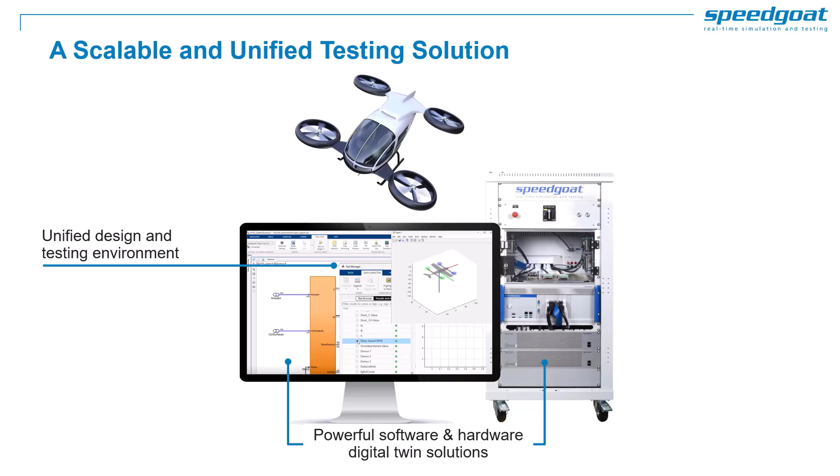In the following, I would like to show you how engineers can successfully handle all those complex tasks using an end-to-end development and testing solution by MathWorks and Speedgoat. You will learn how to benefit from a fully Simulink integrated solution that provides flexible and automated workflows, powerful digital twin simulation software, hardware emulation solutions, and modular racks for hardware-in-the-loop testing, or HIL testing in short, that can scale with your needs.

Before we dive deeper into these solutions, let's review today's webinar agenda. First, I'll introduce typical workflows and the key capabilities of the solution. Then we'll shift the focus towards dedicated controller hardware-in-the-loop testing solutions covering eVTOL powertrains and more electric aircraft with two hands-on demos leveraging Simulink and Speedgoat Test Systems. So let's get started.

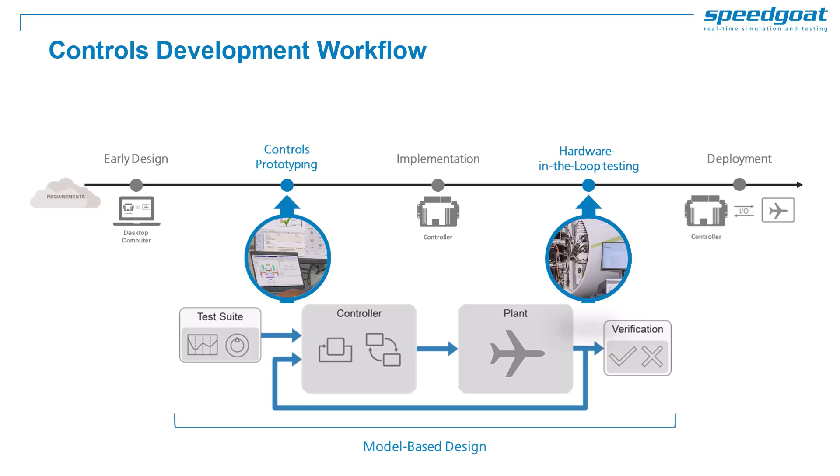What we see here is a default model-based design control development workflow. Every development project starts by defining the requirements.

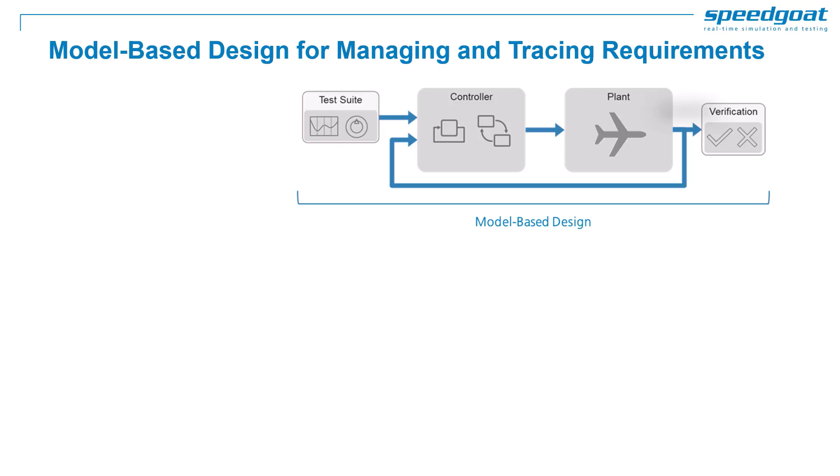Also in aerospace development, compliance to requirements is the overarching goal. Depending on the requirements, they are either stored in documents or tables. Others may already be put into more structured environments like DOORS or other tools. Some requirements may even change along the way, but that will pose no problem if those requirements are rigorously tracked and connected to tests.

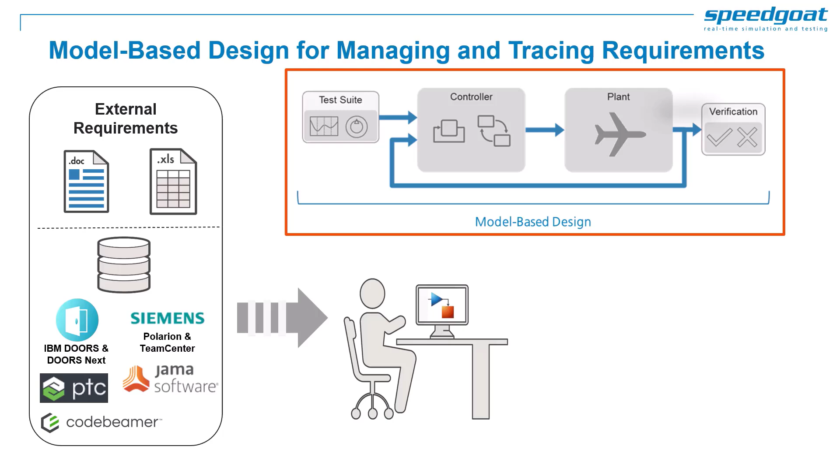Let's see how requirements and tests are connected. Engineers add those requirements to Simulink and convert them into test cases attached to certain models. This enables verifying that new designs meet the requirements. Already here, it becomes obvious that a single location for all test cases is utterly beneficial. So Simulink is not only the development and testing platform, it also helps tremendously to trace requirements.

Let's look a bit deeper into the details. You can import requirements from various sources, and the standard requirement interchange format is supported. You can also author requirements directly from within Simulink.

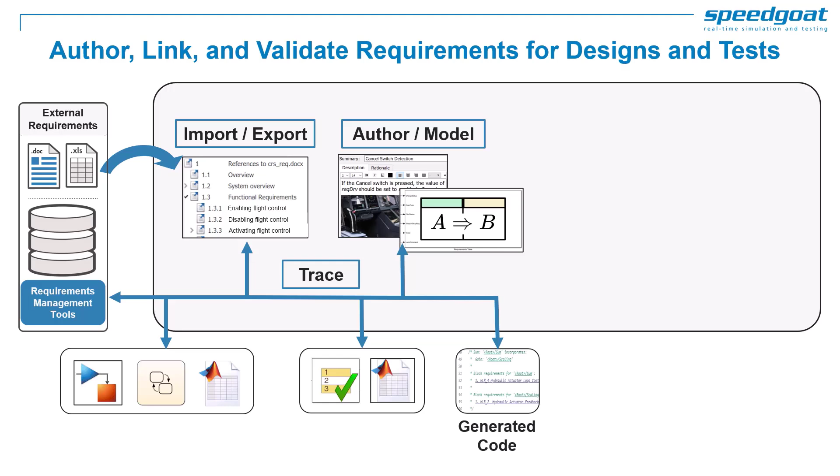With the requirements stored in the development environment, it is very easy to create links between requirements, architecture, design, test and implementation code. Links can be inserted in other tools for traceability, from these tools to MATLAB and Simulink. The coverage analysis reveals the gaps in the implementation and testing.

No problem if requirements change, because if there's an update, there can be an update operation that synchronizes the changes, and notification is given on what is impacted by the requirement change. Reports can be generated for documentation and reviews that include traceability.

Now I would like to show you how model-based development fits into your aircraft system development according to Aerospace Recommended Practice, or ARP in short, 4754A. ARP 4754A is endorsed by civil aviation authorities to provide best practices for demonstrating compliance with regulations.

The development process is broken down into several stages: functional development, allocation of functions to systems, system architecture, requirement allocation, and system implementation, ending with documentation.

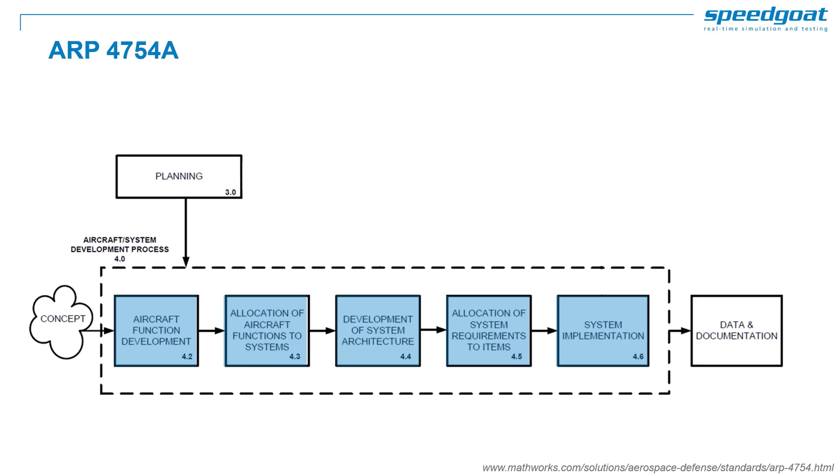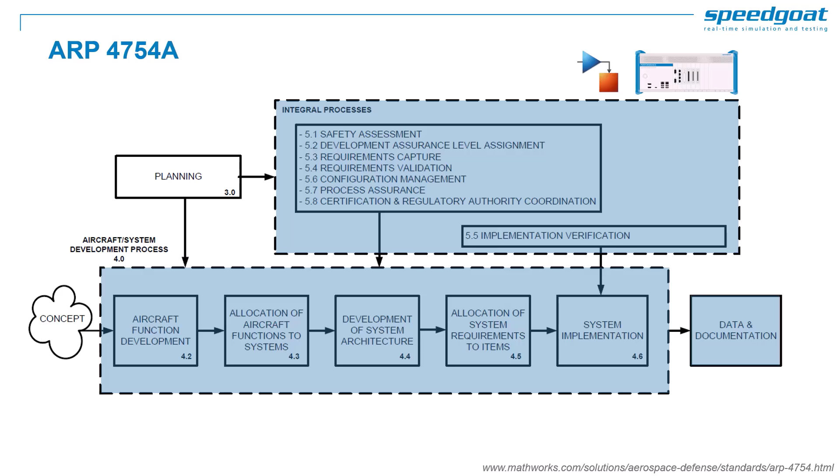To have a complete development and certification, it is important to have a tool chain covering the entire process. So if you are using Speedgoat real-time test systems, you will have a unique and complete integration into MATLAB and Simulink from MathWorks. So all in all, real-time testing enables compliance with ARP 4754, as all aspects of this guideline are covered.

We have seen this development workflow with its stages before. So after requirement definition, you may want to evaluate some early designs on the desktop.

You will likely run some promising control designs on powerful prototype controllers to test how they behave when controlling the actual plant. Once your controller is available and you've successfully implemented your design, you can test your controller as hardware in the loop. So let's dive deeper into these two concepts, starting with controls prototyping.

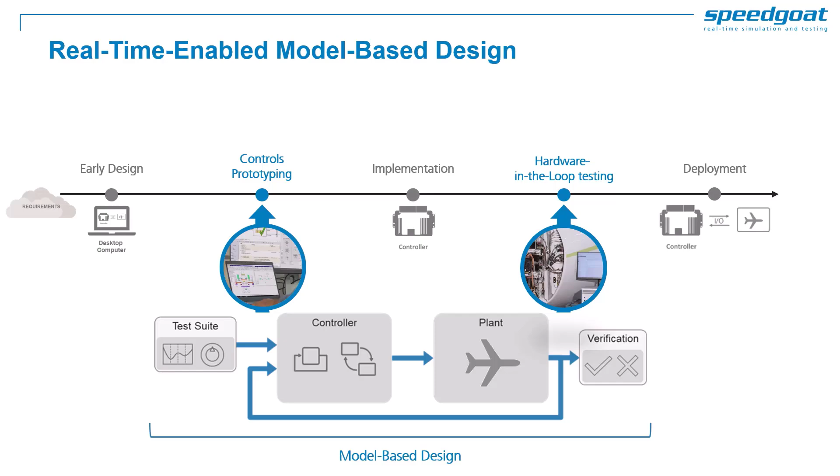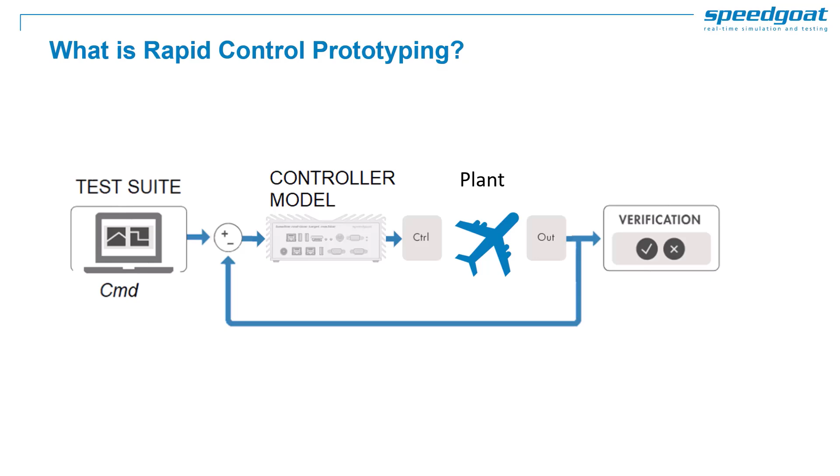In rapid control prototyping, the plant could be your aircraft or Ironbird. The development task focuses on the design of the controller. This means that the real-time target machine emulates the controller and executes the code of your embedded control design in deterministic real time. Performing control tasks in a loop allows you to verify that the controller fully meets the requirements. Early testing of a control algorithm can help you eliminate errors early on.

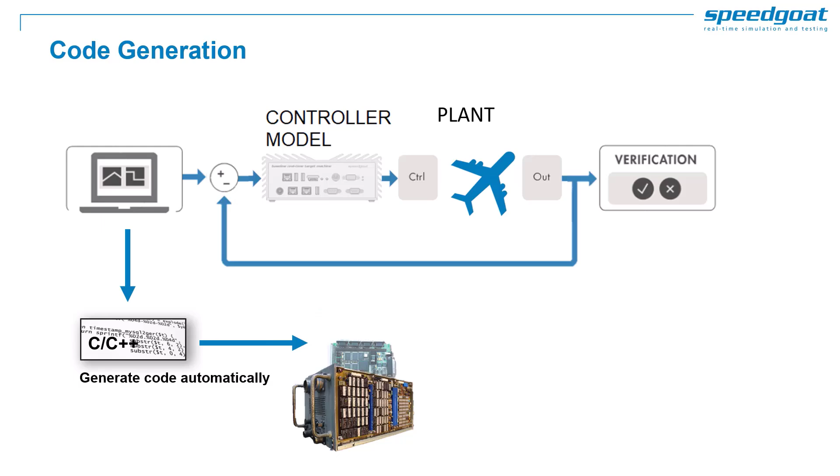Once you are happy with your control design and its behavior in the prototyping setup, you can automatically generate the algorithm in C or HDL code. After compiling the code on your controller, you can then go ahead and test it.

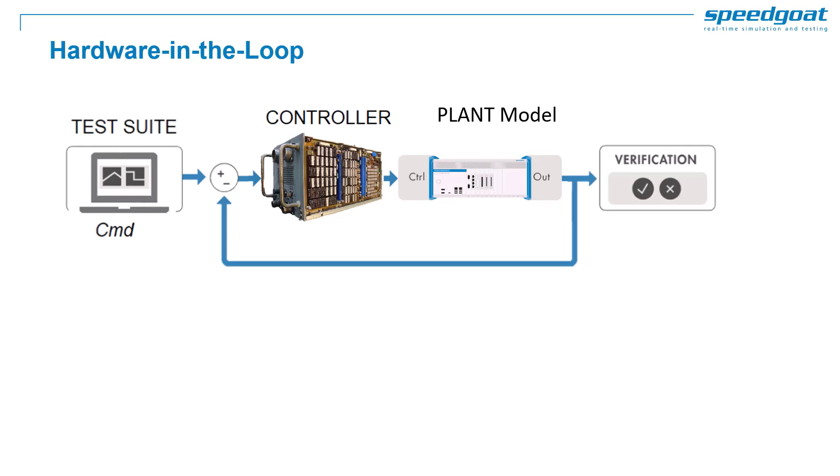You probably do not want to directly put the flight controller into the aircraft. Therefore, you can conduct hardware-in-the-loop testing, where you take your physical controller and run it against a real-time test system, which is a virtual representation, or one could also say digital twin, of your plant.

I would like to emphasize the key differences between testing based on data or data acquisition and hardware-in-the-loop testing. Most of you are already familiar with some form of data-driven testing. Engineers use this in their everyday life: record data, do some post-processing, and perform open-loop testing.

A key advantage of hardware-in-the-loop testing is, and the expression already has the keyword in it, closed-loop testing. This means that you can run dynamic scenarios and interact with your controller. The complete test process can be automated, allowing you to perform complex tasks with a click of a button and to automatically generate test evidence using automated report generation at the end.

You can test against a set of requirements and perform regression testing in case you have some last-minute changes to your code. This approach allows you to test your controller in real time, which cannot be achieved by just doing measurements or data acquisition. Beyond that, hardware-in-the-loop testing allows you to perform system-level integration testing under all possible operational conditions.

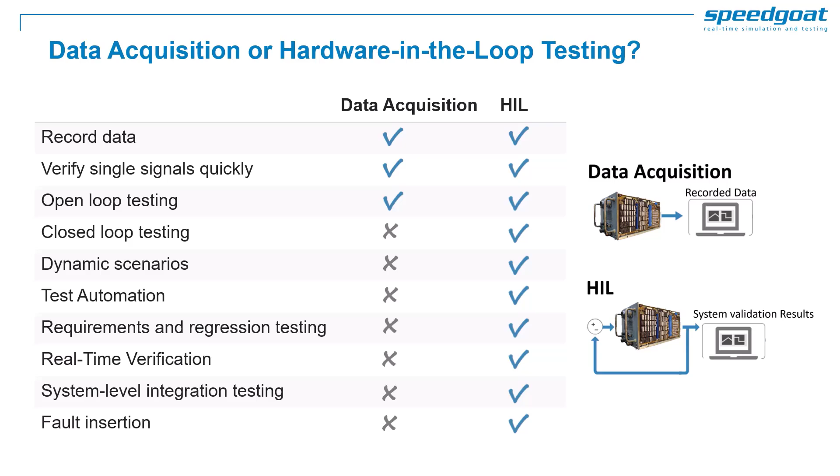Electrical vertical takeoff and landing aircraft, or eVTOLs in short, as well as conventional airplanes, consist of many subsystems. These subsystems must be integrated into one system. To integrate all these subsystems and components, system integration labs, or Ironbirds, sometimes called eBirds if the aircraft is purely electric, have become industry standard.

To get an accurate representation of different flight states, the complete system needs to be run in real time with the respective sensor feedbacks and flight states. Therefore, the digital twin needs a host system which allows it to interact with the Ironbird.

If individual components are emulated instead of being integrated into the Iron Bird, the real-time hardware-in-the-loop test system can handle this by emulating necessary signals, voltage levels, and mimicking the subsystem behaviors.

To test software according to the DO178C standard or hardware to the DO254 standard, it's crucial to ensure all controllers operate as if they were in an actual aircraft and flight state. Therefore, the same twisted pair wiring and voltage levels, such as 28 volt for avionics, are used.

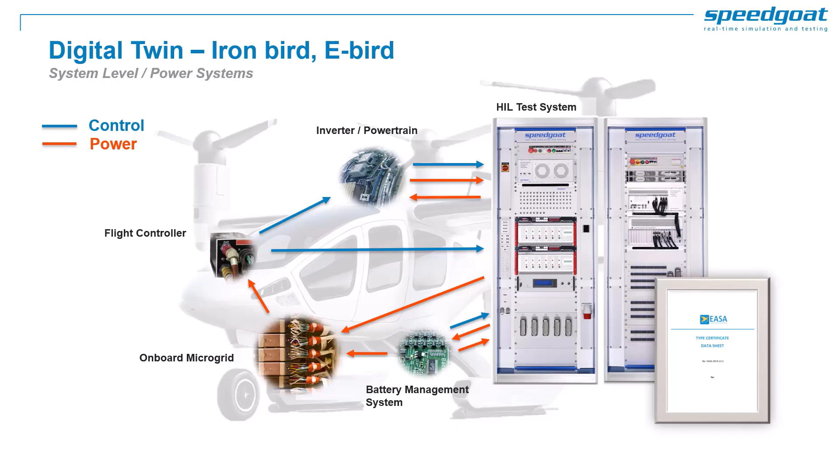Let me give you a better overview on how a hardware-in-the-loop test system of an e-bird is composed and used.

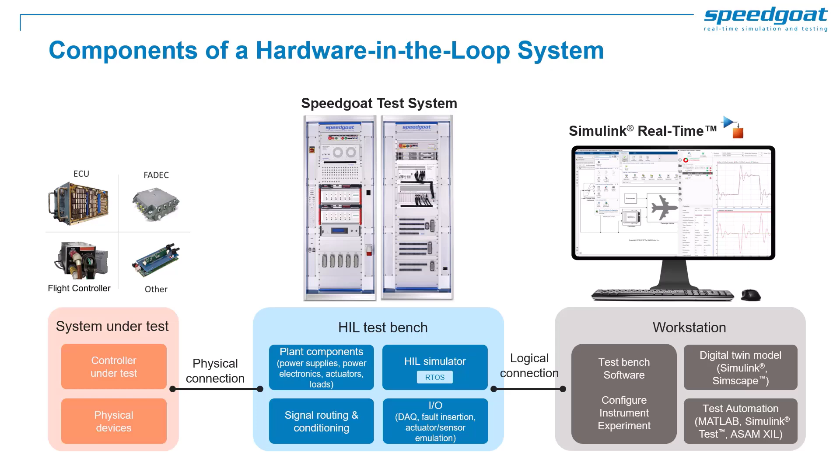There are typically three main components in a HIL test system. First, your system under test, which includes the production controller that requires thorough testing and additional physical components like domain controllers, sensors, and actuators. Second, a HIL test bench, including a real-time simulator where you can run a digital twin of the plant together with emulated plant components and I/O modules supporting data acquisition, signal conditioning, and communication with the system under test. Third, a workstation running application software that supports the setup and operation of the HIL test bench.

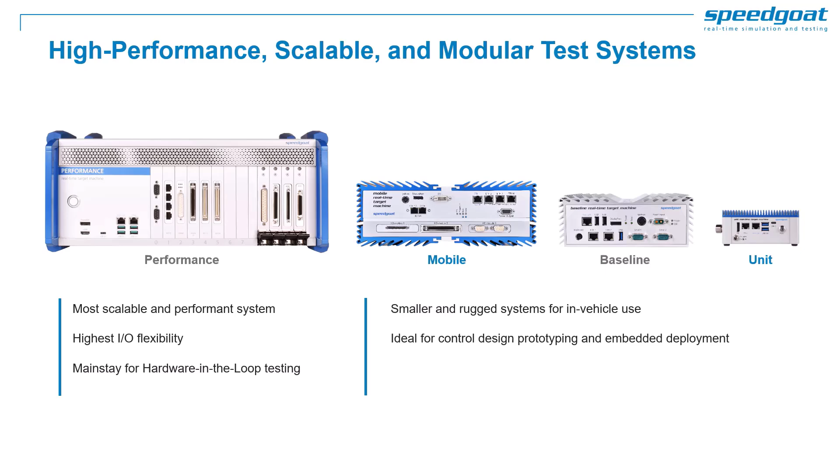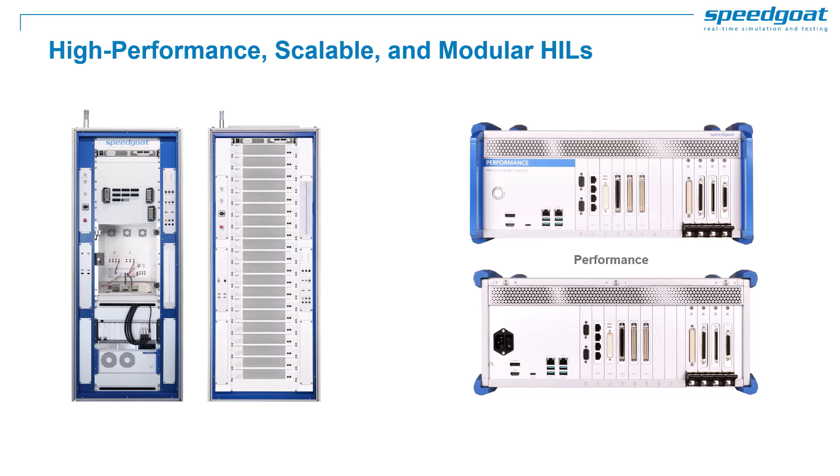The performance test system is suited for desktop use, but also for rack mounting. Speedgoat's HIL system team can provide you with fully customized rack systems for HIL testing, including easy access to all signals via breakout and I/O panels. We'll integrate power supplies, actuators, inverters, and any kind of power electronics, as well as project-specific PCBs for signal routing and conditioning.

Let's move on to focus on dedicated solutions for controller HIL testing of aircraft controllers. We'll start with a workflow demo for an eVTOL powertrain. Yatin, I'm handing over to you.

Thanks, Christoph. In this demo, I will be focusing on ECU HIL testing of eVTOL powertrains. I'll start by exploring the hardware setup and the eVTOL digital twin model behind this demo. Then I'll move on to the actual HIL demo and cover eVTOL real-time simulation, unit-level testing of battery management system and motor control units, and finalize by showing how to automate testing of requirements for specific system-level test cases.

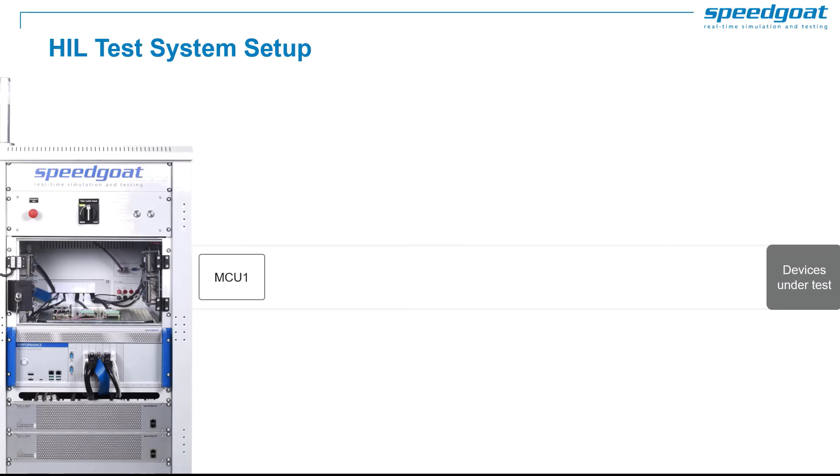So let's start by outlining the HIL test system setup. We are using a smaller scale demo test setup to test two powertrain controllers: a motor controller unit that governs operation of one of the four 200 kilowatt electric drives, and a battery management system composed of a battery management controller unit connected to two real cell monitoring units. ECU communication runs over a CAN network.

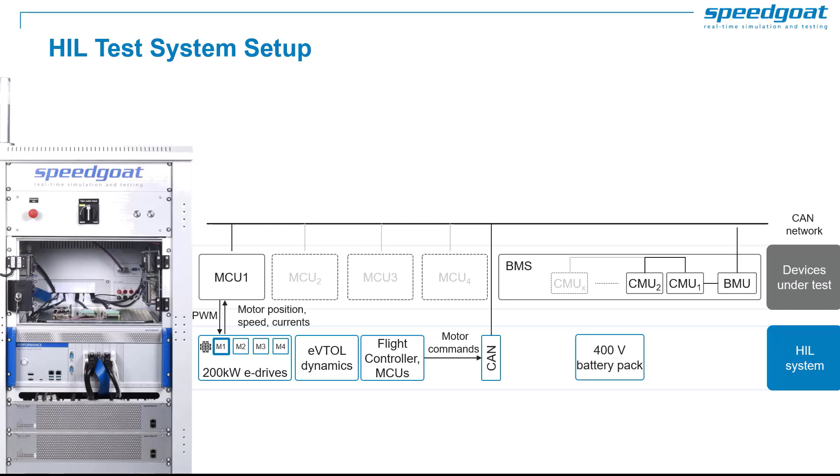For the eVTOL digital twin HIL simulation, we are using a performance real-time target machine. This system runs virtual ECU simulations for the flight controller and remaining motor control units. The eVTOL dynamics FPGA-based motor drive simulations enable encoder and current sensing emulation to the real motor control unit, as well as a 400 volt battery simulation model to meet the interface needs of the two real cell monitoring units and enabling testing of the analog front end.

We have integrated two battery cell units, providing realistic cell level emulation for 24 out of the 100 cells of our battery pack. As this demo system does not integrate emulation of hardware for temperature sensors, the current shunt, or the missing cell monitoring units, the simulated signals are fed to the BMS controller through the existing CAN interface.

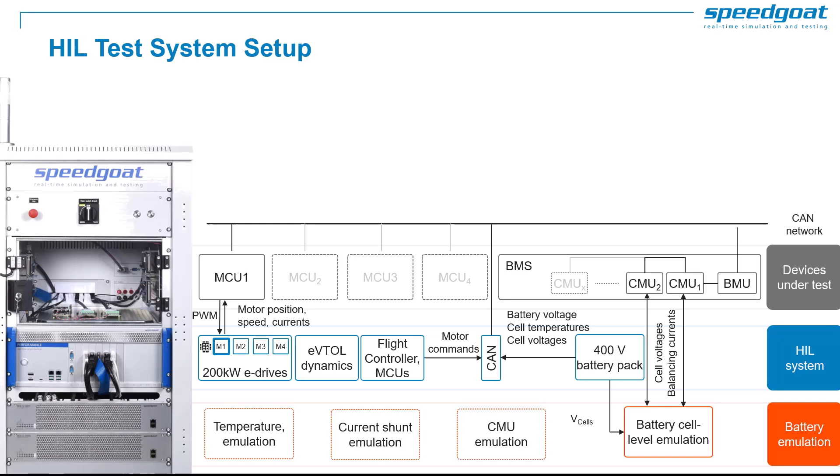The entire HIL test system is managed from a host computer, which enables control and monitoring of the real-time application as well as 3D visualization of the aircraft and surrounding scenes.

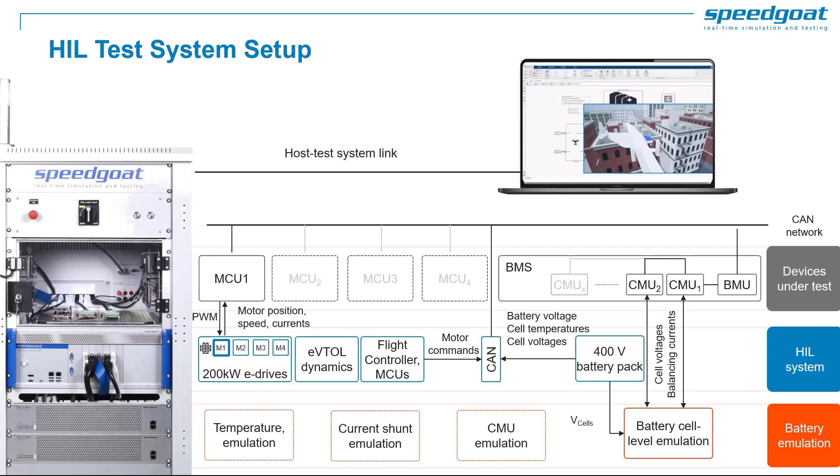Let's now switch to Simulink and check how these blocks map to a real-time application and Simulink models. Our eVTOL model features a flight controller that sends commands to the motor drive, which integrates 4 rotary propulsors.

The battery system consists of a 400-volt battery and a battery management system that ensures safe operations and cell balancing. The flight dynamics subsystem adds physics and gravity, enabling us to visualize a vertical takeoff and landing aircraft in Unreal Engine while flying a mission within an urban environment.

Let's leverage the custom active workflow of UAV Toolbox to visualize aircraft performance in a photorealistic environment.

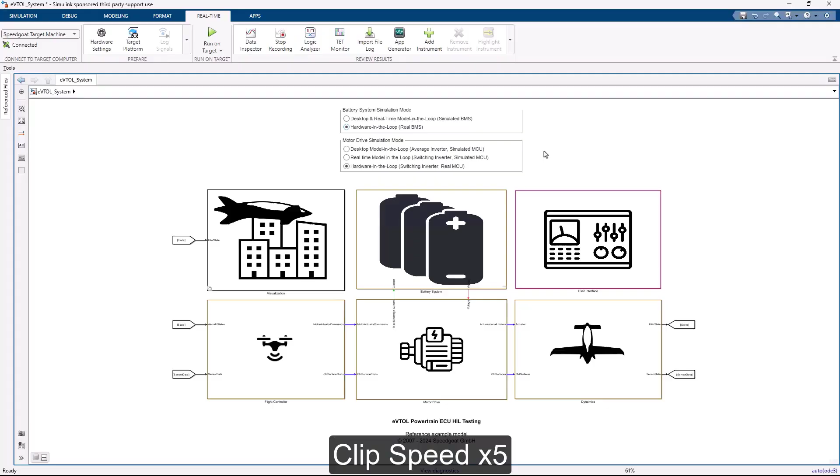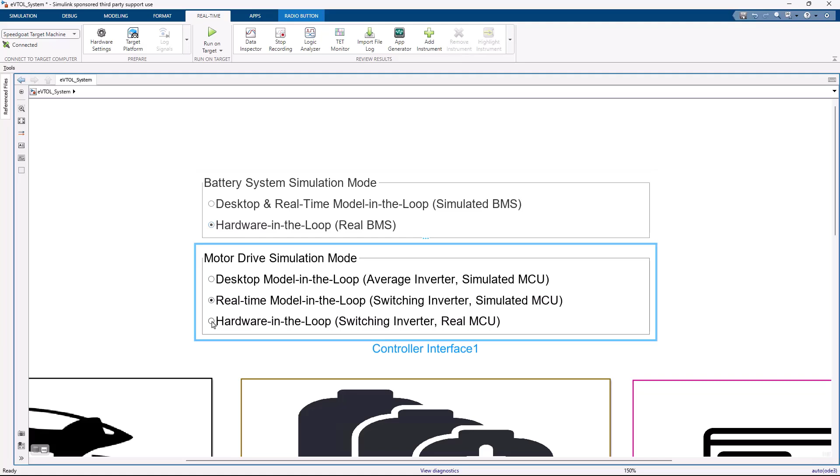Different simulation modes can be selected for BMS testing and motor control tests. The options include hardware-in-the-loop testing, which allows us to emulate the battery on a battery cell emulator and test battery control algorithms on an external ECU, and a real-time motor simulation on a Simulink programmable FPGA, enabling simulation of high switching dynamics, fault insertion, as well as encoder and phase current emulation, while testing the motor control algorithm on an external ECU. We can also select desktop simulation, which allows testing in the initial development phase, useful for iterative debugging sessions.

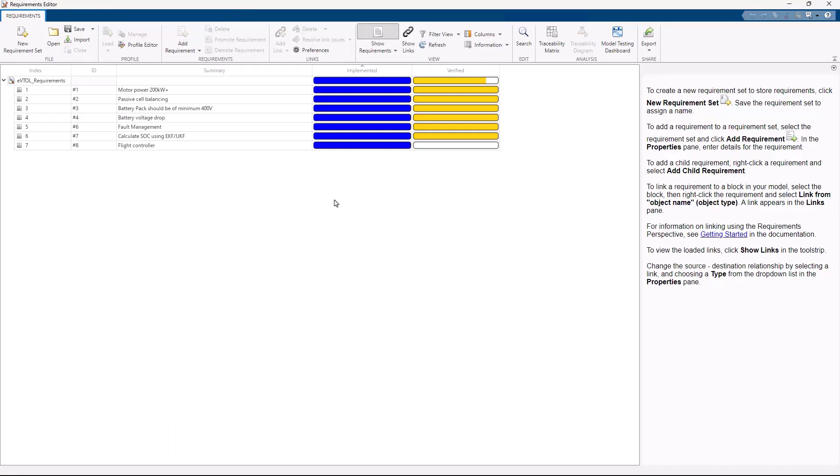The model also serves as a digital thread connecting design requirements to model components and test cases using Requirements Toolbox.

Requirement Toolbox enables us to validate requirements within MATLAB and Simulink. The requirements are linked to a subsystem where it's implemented.

For example, the logic for battery voltage drop limit is implemented in the BMS controller subsystem, and the calculation of state of charge is verified using a Simulink test linked to a Simulink test manager, as you can see here.

Simulink test manager is a tool that helps to create test cases for Simulink models and code in Hardware-in-the-Loop execution environment.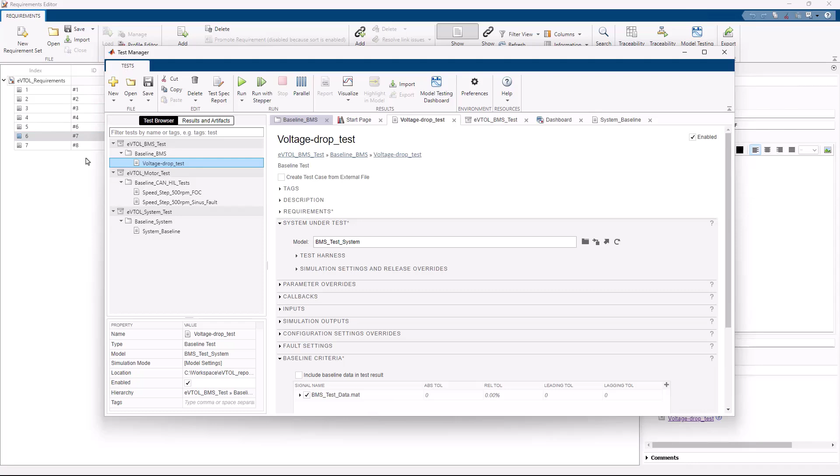This allows us to formalize the requirements and analyze them for consistency, completeness, and correctness using the requirements table. Let us start the demo by running our eVTOL in real time for a guidance test.

The system user interface displays motor speeds for all 4 motors, battery voltage, current, power, and the state of charge of the battery. It also displays the currents from the motor for system level monitoring and testing.

We can also manually control the aircraft to handle specific maneuvers by changing the input commands to the aircraft.

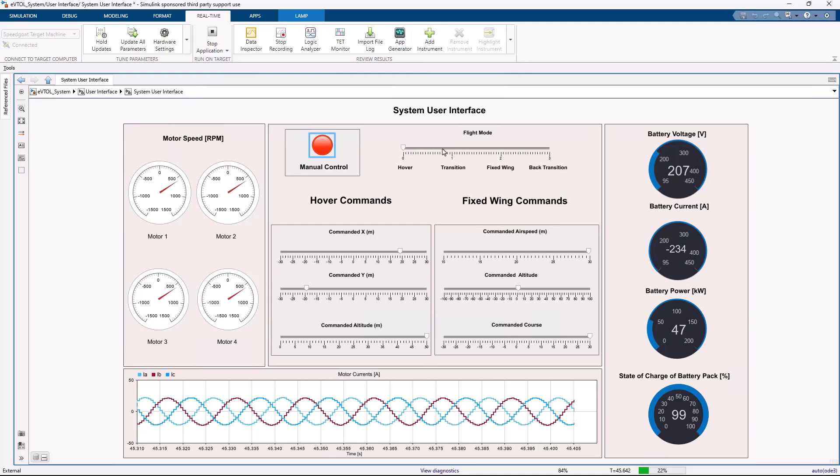As the guidance test scenario runs, the rotary wings move the aircraft from its initial position to a certain altitude, hovers, makes some turns, and eventually lands back vertically.

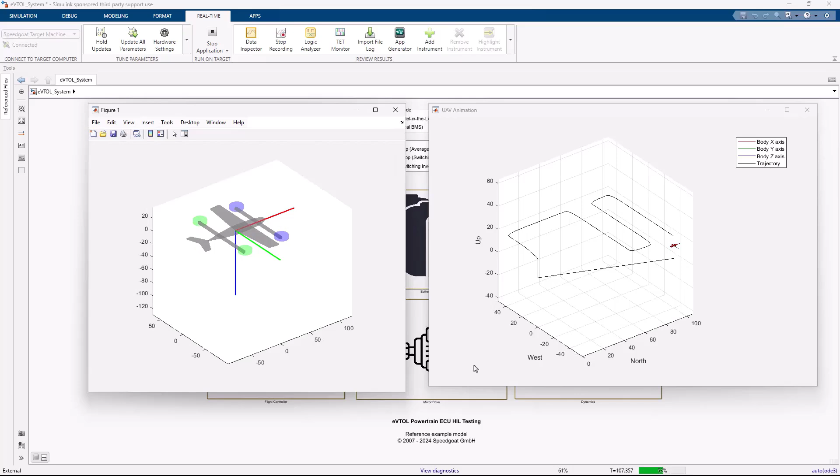We can observe the maneuvers in a 3D visualization along with the path taken by the aircraft as well. We also see the battery voltage dropping as high currents are being discharged.

Let's now zoom in and examine our battery and motor drive system, focusing on unit level HIL testing for battery management system and motor control units.

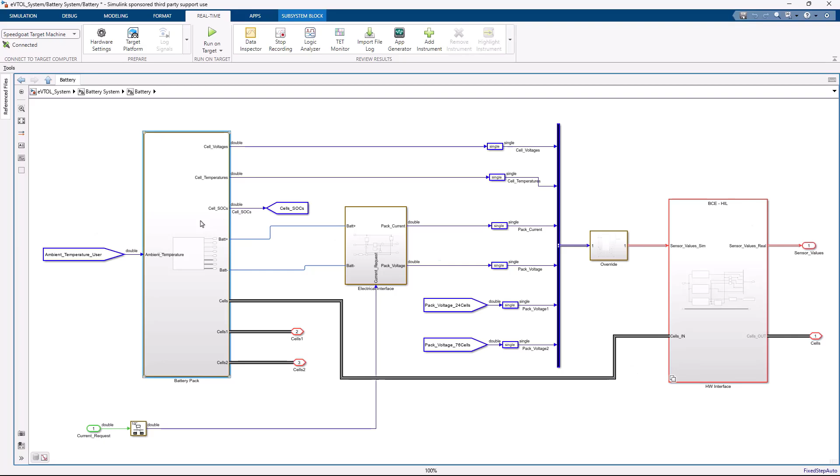Our 400-volt battery is modeled using Simscape battery. It consists of 100 cells grouped into 3 modules of 24 and 38 cells.

One of the modules of 24 cells is emulated on two battery cell emulators, 12 cells in each emulator, and the other cells are simulated in this reference example.

Essentially, we can emulate up to 252 cells by daisy chaining multiple battery cell emulators depending on your use case.

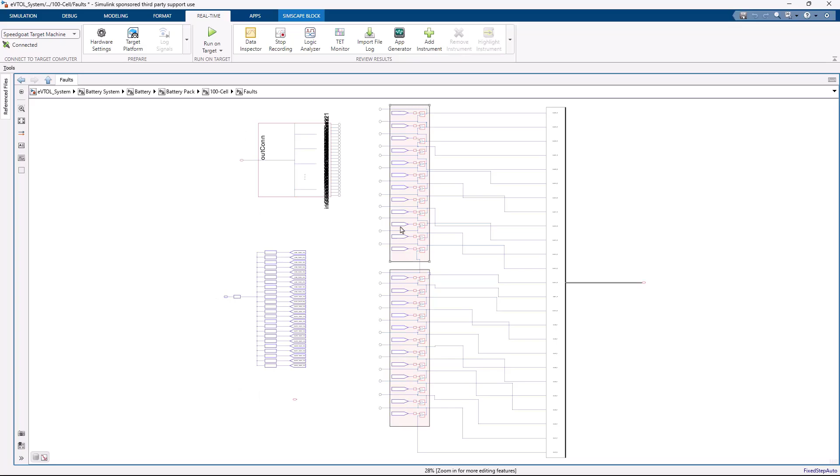The 3 modules are connected to a fault insertion interface, allowing fault insertion at the cell level, and a passive balancing interface to effectively mimic the cell balancing currents issued by the BMS controller.

As mentioned before, the first module containing 24 cells is connected to two Speedgoat battery cell emulators.

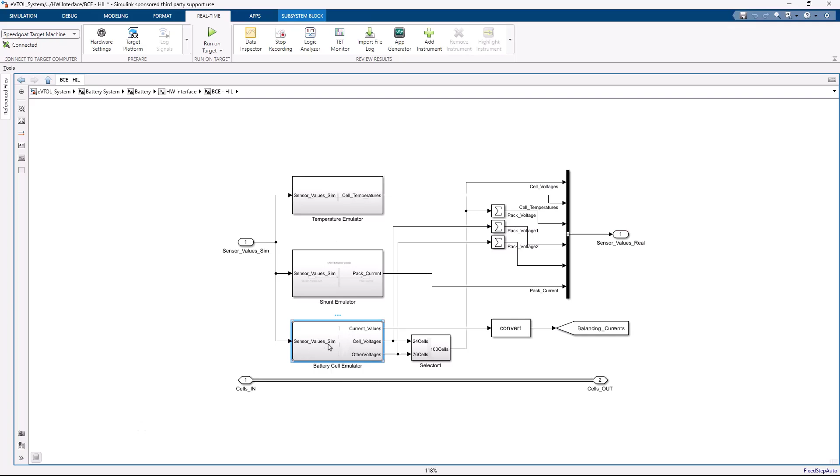This enables cell level emulation and provides a HIL system with an analog interface with the 2 cell monitoring units of the battery management system. The interface with battery cell emulators can be done with a few clicks using a dedicated hardware configuration user interface.

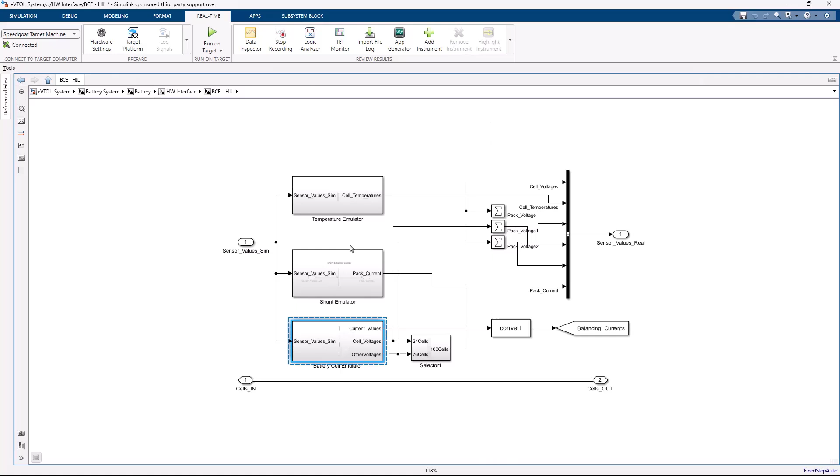To test the BMS, we can select Hardware in the Loop Simulation mode. This adapts the hardware interface to work with the actual BMS controller.

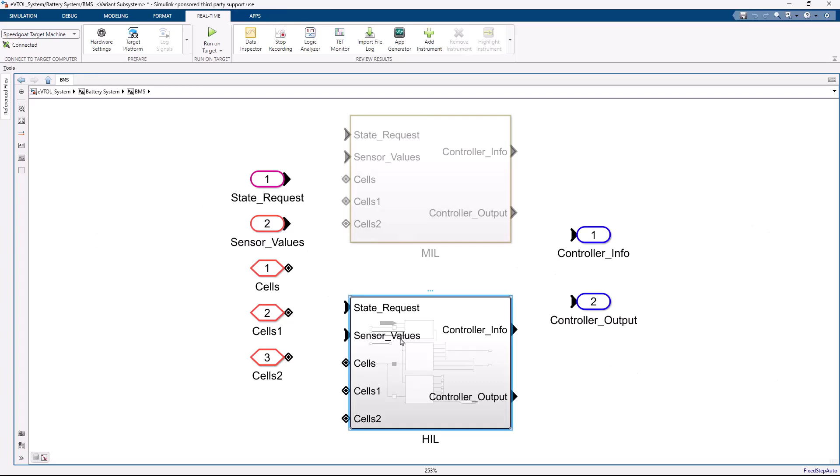For instance, here we can see the CAN interface which transmits battery data such as the cell temperatures and pack currents.

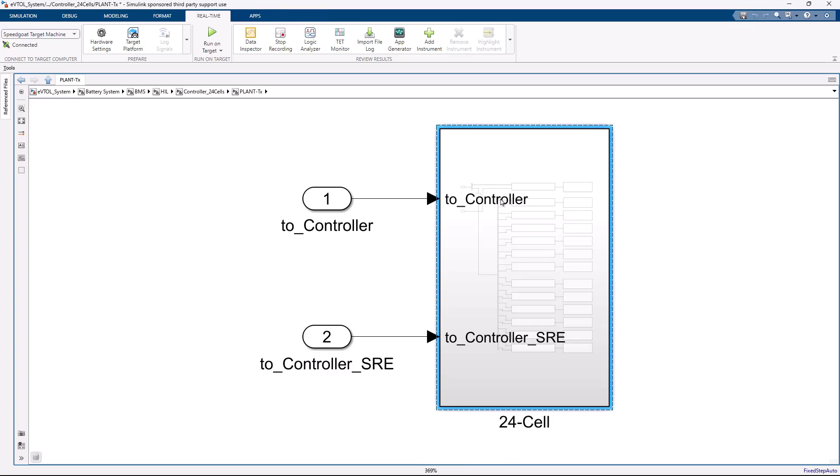At the same time, it receives signals from the BMS controller such as current limits of fault, charge and discharge, state of charge, and fault diagnosis data.

Let's build and run the configuration to start HIL testing of the BMS.

The BMS user interface also helps with monitoring important parameters in the battery system like battery voltage, current, state of charge, and power. It also allows us to insert faults and observe all cell data by just entering the cell number. You can observe the state of charge, voltage, temperature, and current for each cell that you enter.

For instance, we can validate the BMS cell balancing. To do this, let's override the voltage of cell number 1 to 1.5 volts. You can observe that the voltage for cell number 1 is now 1.5 volts.

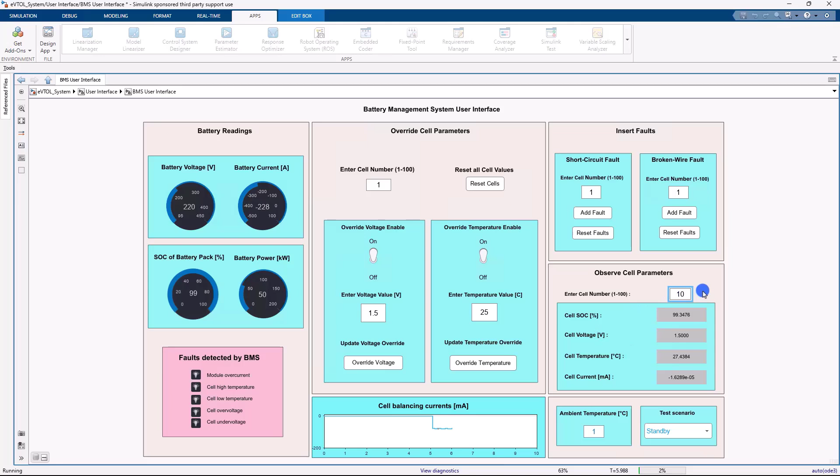We can see that this effectively triggers cell balancing on the other cells, with discharging currents occurring at a much higher rate to match the state of charge of cell number 1. For example, it can be observed that cell number 10 has a balancing current of about 78 milliamperes.

We can also use this UI to introduce faults. For instance, I will add a short circuit fault to cell 10. We can observe that the voltage for cell 10 has changed and is incorrect.

Similarly, I will also add a broken wire fault for the same cell. Here the voltage has gone down to 0.

Overriding the parameters is also a simple task. Using this UI, you can now notice that the temperature for cell 10 has been overridden to 25 degrees Celsius. As you can see, the cell balancing has stopped after I reset all the overwritten values.

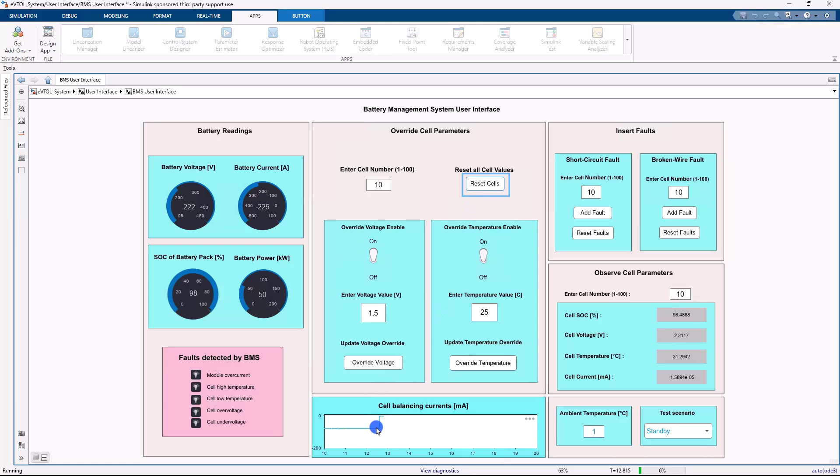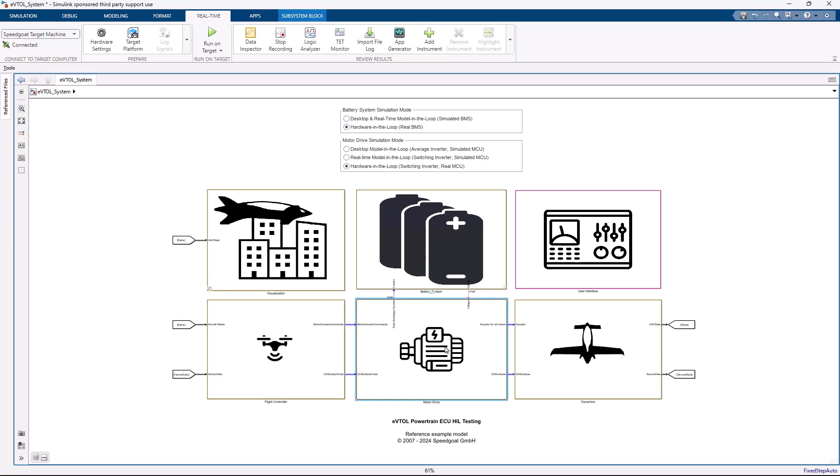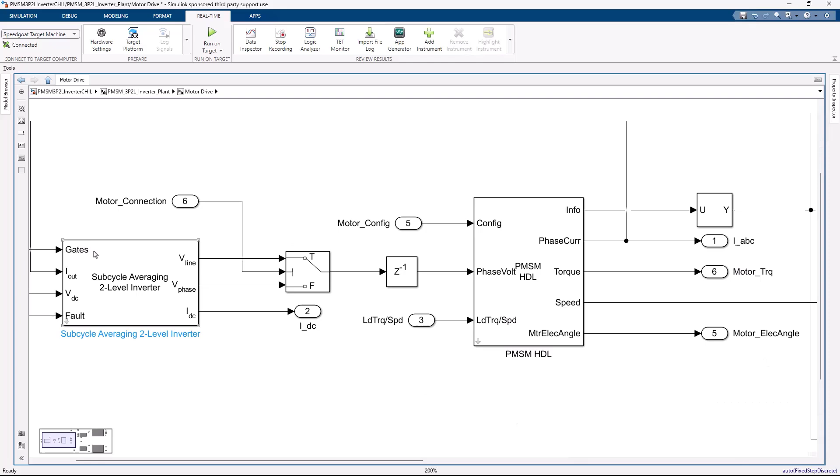Let's now explore the motor drive system. It consists of 4 rotary wing propulsors modeled using 4 permanent magnet synchronous electric motors and their respective inverters. Here's a quick look at the motor drive that consists of switching inverters driven by PWM fire pulses captured at 5 nanoseconds, a permanent magnet synchronous motor, and a quadrature encoder that senses motor positions and speed.

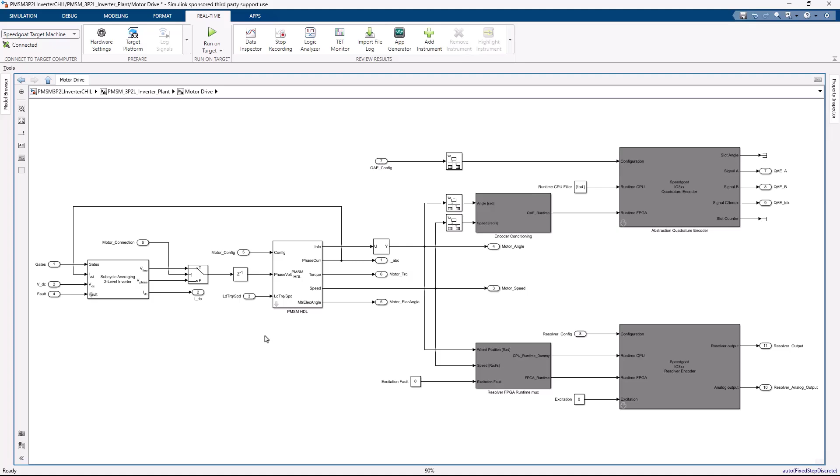There is also a resolver, and you can choose to use a resolver or a quadrature encoder. This model runs on a Simulink programmable FPGA at 200 nanoseconds, enabling the simulation of high switching dynamics, fault insertion, as well as encoder and phase current emulation. This allows thorough testing of motor control units (MCU) at the signal level.

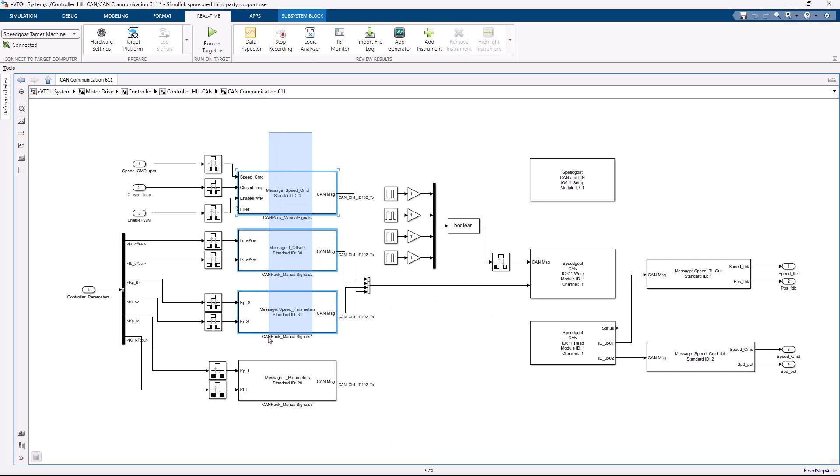All 4 motor drives are controlled by a field-oriented control algorithm. These controls can be virtualized to run with the eVTOL digital twin, or deployed on the intended embedded hardware and interfaced via CAN bus, which is the option we will use here for demonstrating our motor control unit HIL testing.

Similar to BMS, we can test the motor control unit using a dedicated user interface. For instance, we can add an inverter fault and also tune the controller parameters live and perform rapid assessment of controller performance.

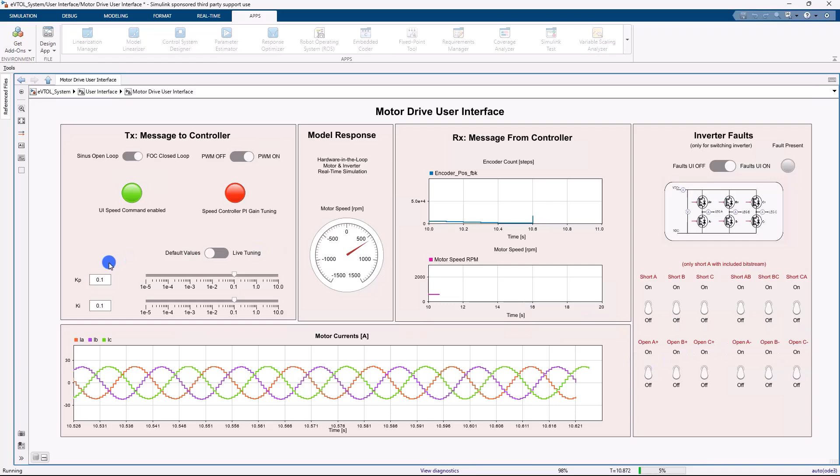Testing from Simulink with a click-based approach is great, but to thoroughly test your controllers, you need to run a large set of tests in an automated fashion and have a formal process to validate your requirements. So in this part of the demo, I would also like to show you how you can automate your testing and bring things to system level testing where the BMS, motor control unit and the virtual flight controller can be tested together.

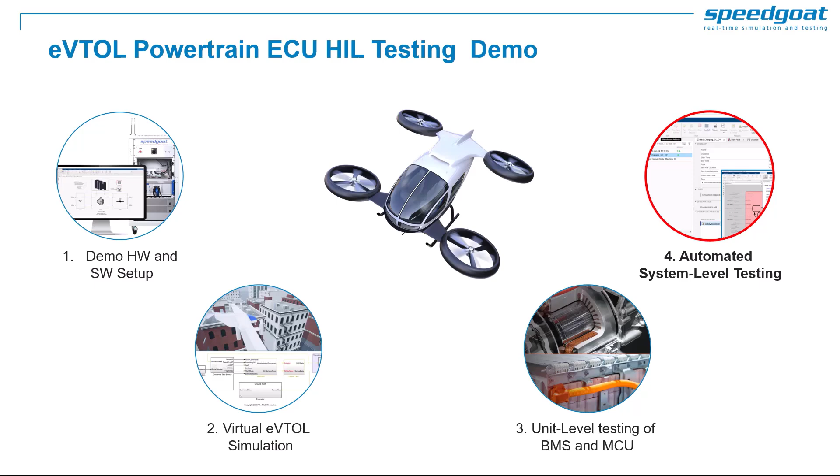I've authored a set of requirements-based tests in Simulink Test. In this example, we have system level tests as well as unit level tests for both BMS and motor control units. Let us run a system test that is linked to one of the requirements and observe the results. The requirements are also linked to a subsystem where they are implemented in this model.

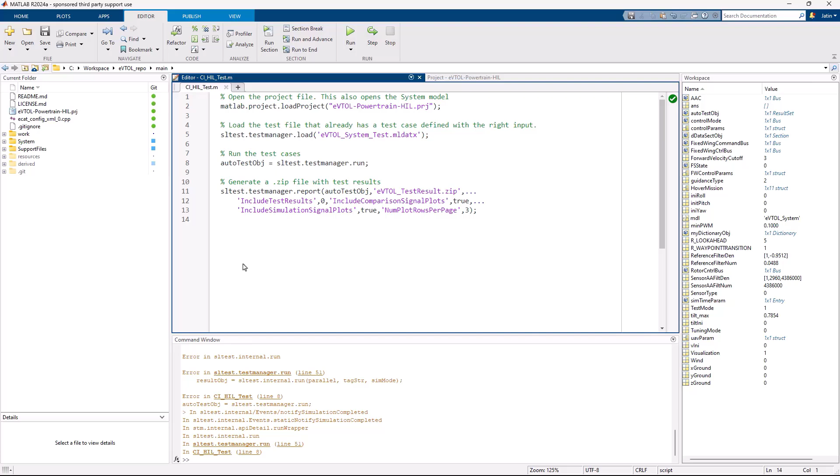Here you can observe all the signals and parameters from your system and validate them. For example, the motor speed and the speed feedback can be compared very easily. Automation is also possible with scripts using the MATLAB API. For instance, I have created a routine that runs the full batch of tests and generates a test report which can be used to communicate results with the stakeholders.

This is how you can use Speedgoat and MathWorks HIL testing solution to perform interactive and automated test validation of eVTOL powertrains from components to system level testing. This was the end of the first demo. Let's move on to our next demo for more electric aircraft.

Let's get started with the HIL test demo for more electric aircraft. The HIL system is composed of a performance real-time target machine with multi-core processors that will simulate the more electric aircraft's digital twin. The system also features an intelligent ARINC 429 I/O module enabling communication with the EMS controller.

Since I don't have an actual controller available, I will simulate both the electric aircraft and EMS controller components in a Speedgoat target machine and extend my model with the ARINC 429 interface. This lets me validate the controller logic and protocol specifics in real time. The HIL system is controlled and monitored from a development computer.

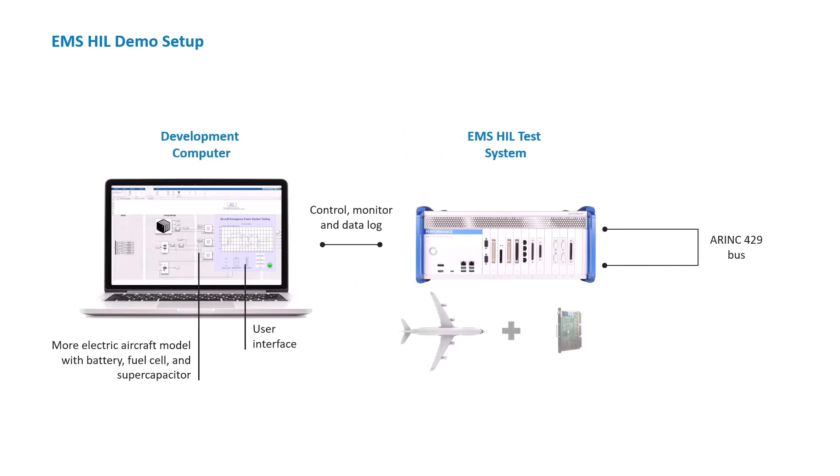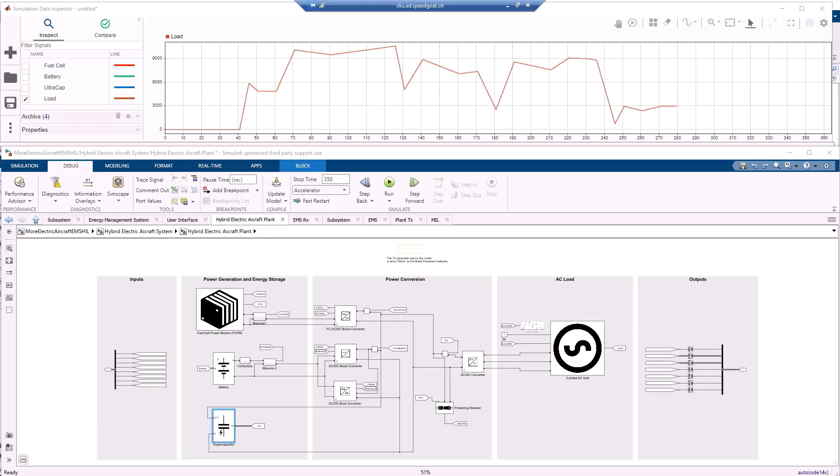Let me take you through the Simulink model. This is an aircraft emergency power system with fuel cell, lithium-ion battery and ultracapacitor. The goal of this model is to emulate the scenario of an emergency landing with a generator failure. Let's have a look at how the emergency power system is modeled. On the left side, we see a power generation and energy storage system composed of a fuel cell, battery system and a supercapacitor.

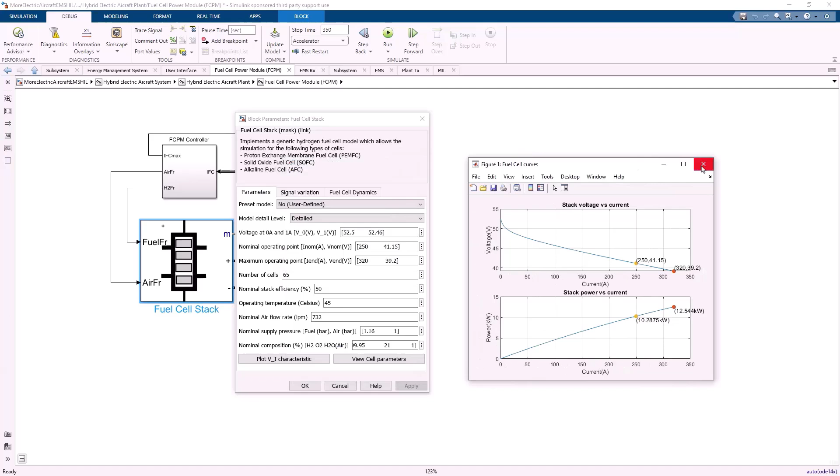Let's open the fuel cell block, which is currently configured to simulate a 10 kilowatt proton exchange membrane fuel cell power module. But you can fully customize your fuel cell stack, check its power envelope, load different predefined cell stack presets as well as customize new ones.

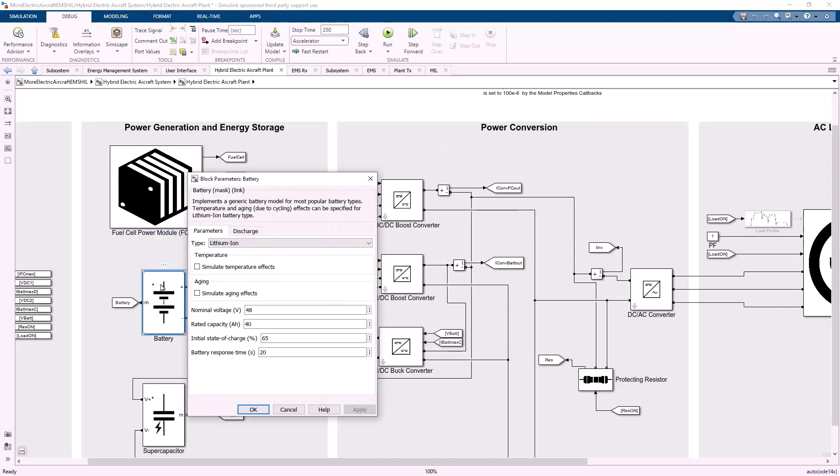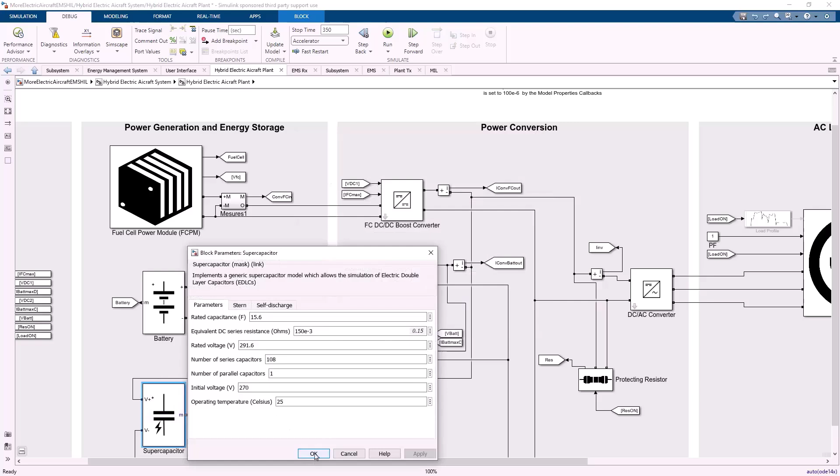The battery is configured to operate as a 48-volt lithium battery system, but you can choose among different battery technologies and customize key battery parameters. The emergency power system is completed by a supercapacitor, a 15 kilowatt protecting resistor that avoids overcharging of the supercapacitor and the battery, various DC-DC converters handling power conversions for the charging and discharging of the energy storage system, and the three-phase AC load that emulates an emergency load profile.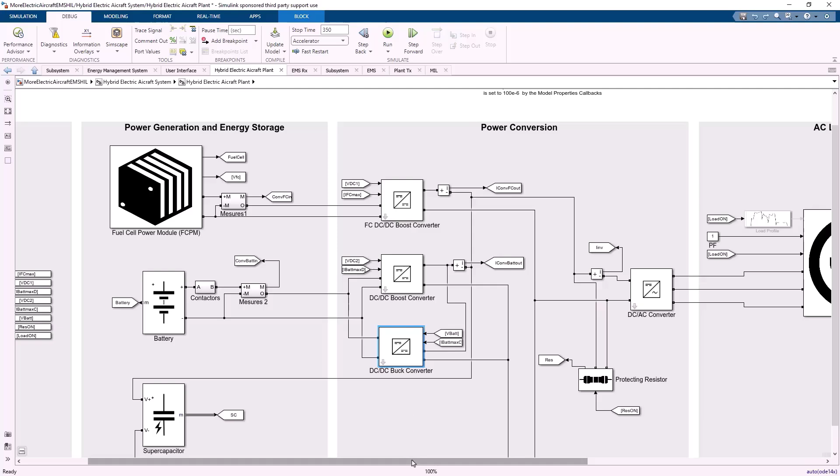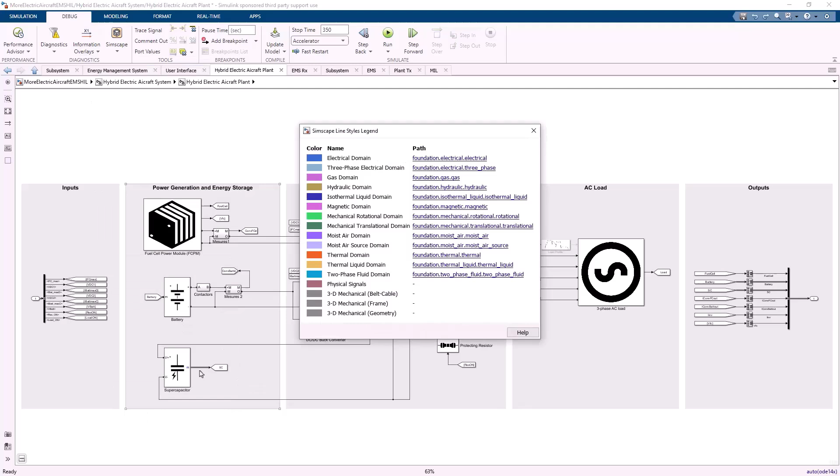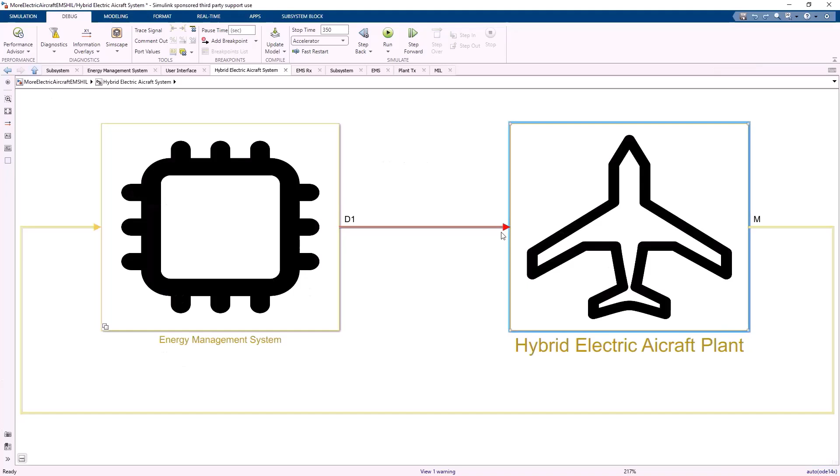The model uses a mix of Simulink and Simscape blocks covering multi-domain and multi-rate simulations of the aircraft power system. That's the plant side of the model. Going up one level, we find the EMS controller. You can see the model supports various controller simulation modes from model in the loop to hardware in the loop, where one can interface with an external EMS controller.

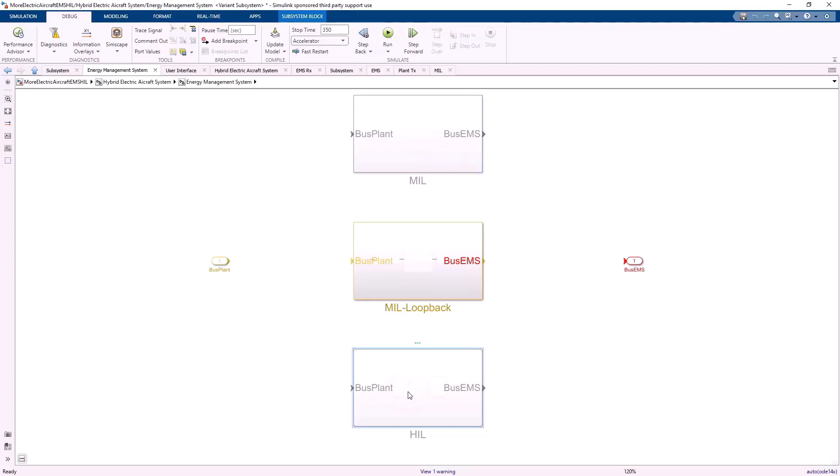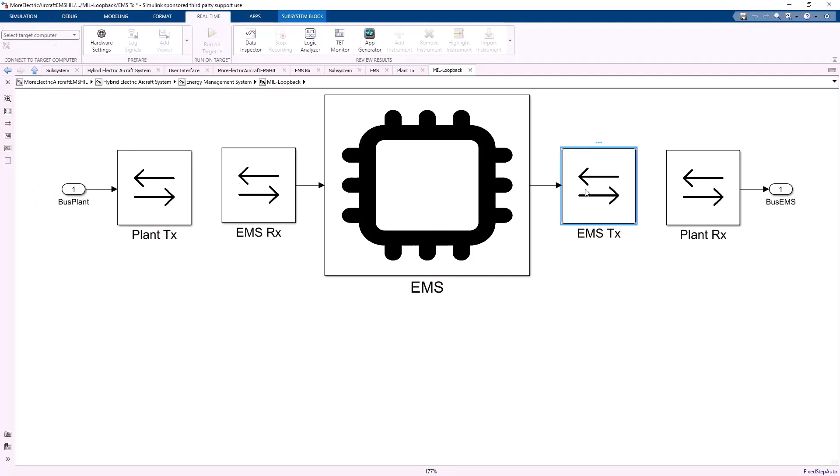I'll go ahead and select the real-time mode that integrates the ARINC loopback interface as previously described. The signals are sent out from the plant into the controller and afterwards back from the controller into the plant. In this ARINC send block, you can see how the protocol is constructed. We send the parameters which come out of the model and we encode them according to the ARINC standard. The standard allows for several communication level settings which can be set in these parameters.

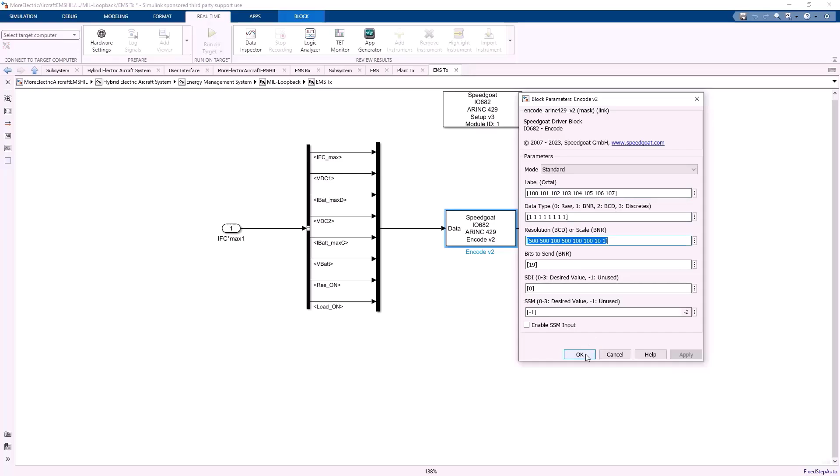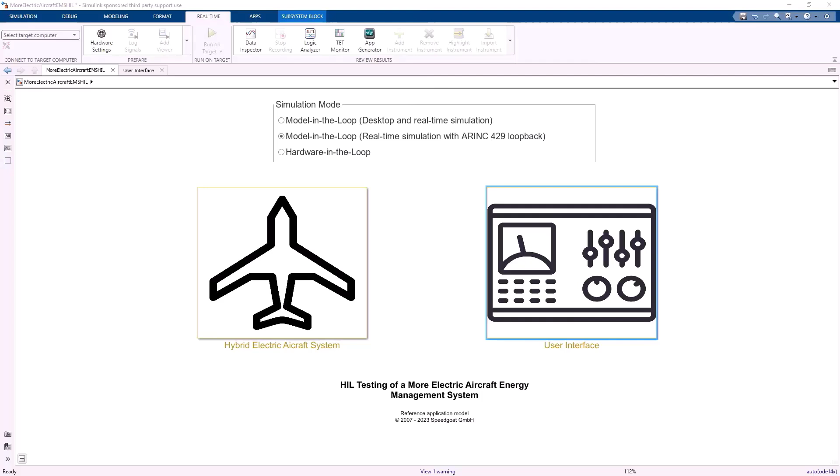Here, the same application may also run CAN or a different protocol such as ARINC 825, ARINC 664 or MIL standard 1553, for example. Now let's perform a real-time demo and check how the EMS controller and the fuel cell hybrid emergency power system react during a 5-minute emergency landing scenario.

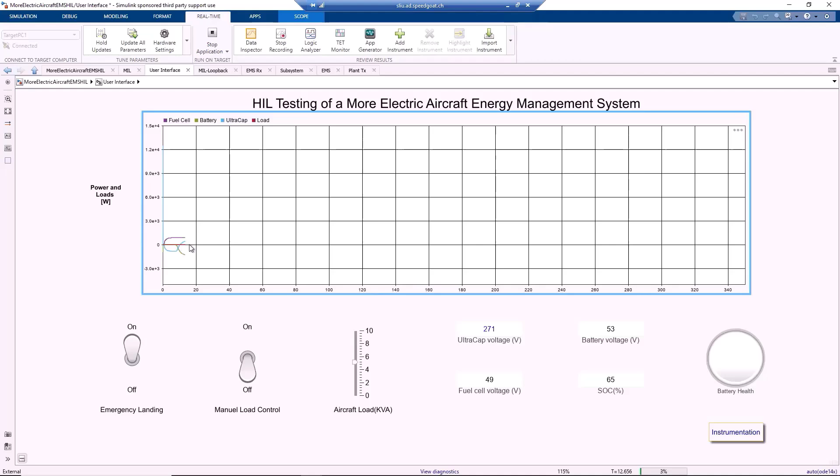I'll select the model to run on the Speedgoat target machine and open a dedicated Simulink user interface for live testing. The overall load is red. Right now it's 0. The fuel cell provides some power to charge the battery, and therefore the green line is negative. After a short while, we will see that the generator is lost. You can immediately see that the load spikes and so does the ultracapacitor.

Since the ultracapacitor is the fastest element, it reacts first. Then the output of the capacitor is reduced due to the voltage drop, and the battery will react to compensate the voltage drop, and the main load is taken by the fuel cell. The battery is stable at a maximum output when the load keeps increasing, even bigger than the fuel cell and the battery capacity. The ultracapacitor will provide the extra power when load drops sharply.

The ultracapacitor takes up the transient behavior by actually being charged, while the battery stays constant for a short while. Now with the load further dropping, the fuel cell can provide enough energy to charge the battery again. With the small load, you can see that the plane has landed, and while it is on the ground, the fuel cell is used to charge the battery.

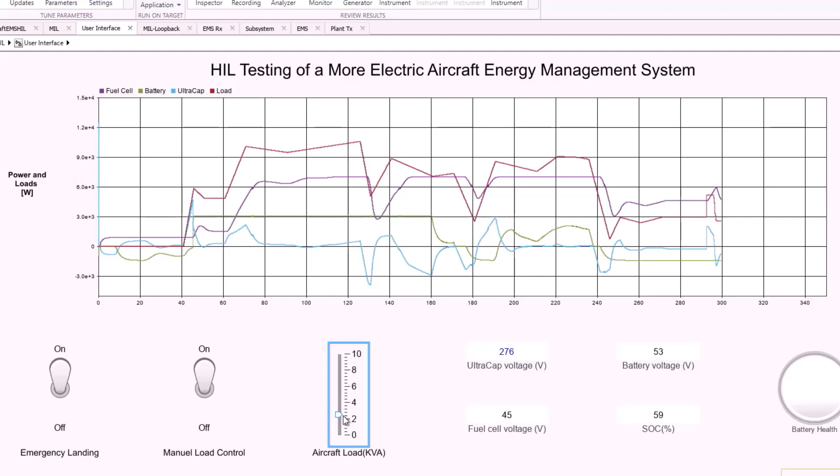Below you can see some elements like state of health of the battery in case you want to inject different behaviors. You can also override the load manually during the simulation here. This allows for maximum testing flexibility even during ongoing tests. This is the end of the simulation. A potential next step, which I'm not going to show here, is to perform automated and regression tests of your EMS controller.

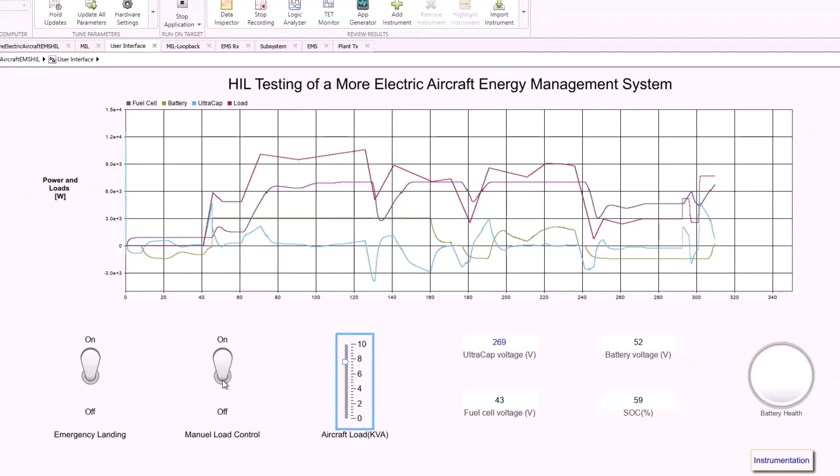We hope this illustrates nicely how Speedgoat and MathWorks HIL testing solution can support you in expediting development of more electric aircraft.

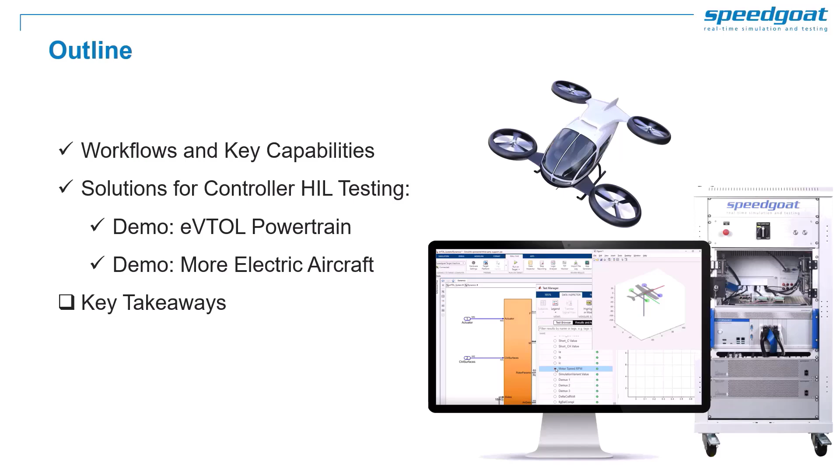Thank you, Yatin. So let's wrap up today's webinar. There's a single key takeaway for you today. Speedgoat Test Systems and the Simulink platform provide a testing solution for all aspects of eVTOL and more electric aircraft development and testing. Why is that? Well, first, you can create digital twins of your systems or their components covering multiple domains running at desired frequencies, such as the switching frequencies of your power electronics hardware.

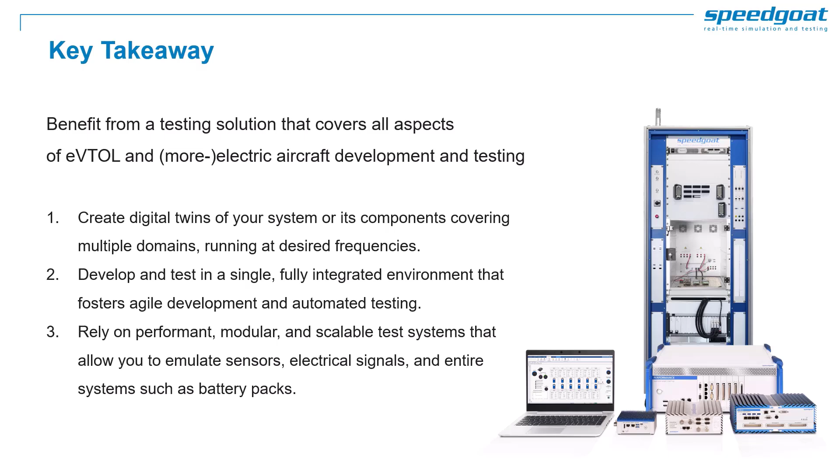You can develop and test in a single, fully integrated environment that fosters agile development and automated testing. And last but not least, Speedgoat Test Systems are performant, configured to your needs, and provide all levels of emulation capabilities for testing your controllers.